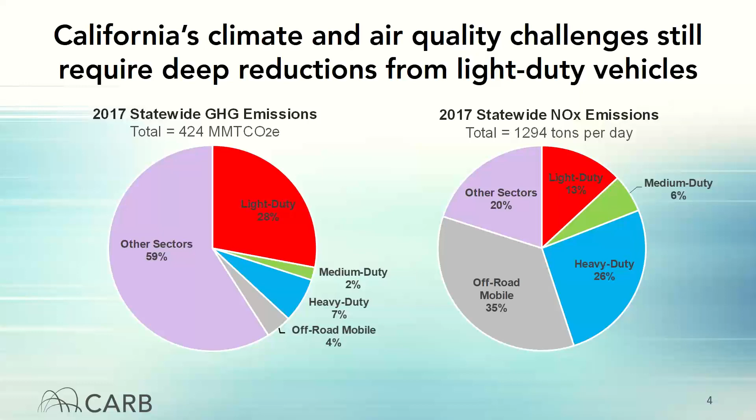Of course, this transition to electrification will not be free, and you will hear an update on our cost estimates for these ZEV technologies. We have also begun meeting regularly with advocacy organizations and community groups to gather feedback on ways to increase ZEV accessibility to priority communities, and hope we can share some details on those proposals at our next workshop.

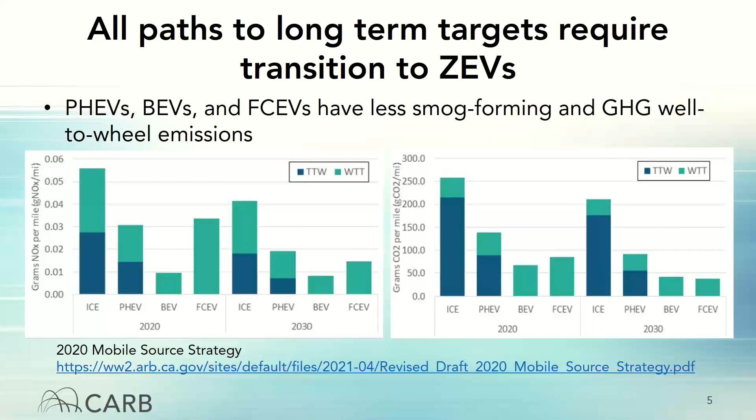However, as you will hear later in the presentation, future plug-in hybrids will need to be both cleaner and more advanced than the ones you see in showrooms today. And given the greater uncertainty surrounding their emission benefits, as well as the limited supply of liquid biofuels that will be available in the future, the degree to which plug-in hybrids can be used for this transition will be constrained.

Nevertheless, we believe that all three technology types will be necessary to achieve the governor's goal of 100% ZEV sales by 2035, announced shortly after our last workshop. In that executive order, he directed CARB to set regulations toward meeting this goal, and you will hear more about those proposals later in this presentation.

So we'll start today with updates to our low emission vehicle criteria pollutant proposals. That will be followed by the proposed changes to the zero emission vehicle regulation. Then after a break around 11, we'll update you on our work on ZEV technology costs before moving on to updates on the ZEV assurance measures. And then we'll wrap up with our proposal for battery labeling to facilitate recycling and reuse. We'll stop for questions again after each of these before concluding with our next steps. So I'll now pass it on to Marco to start with our first item.

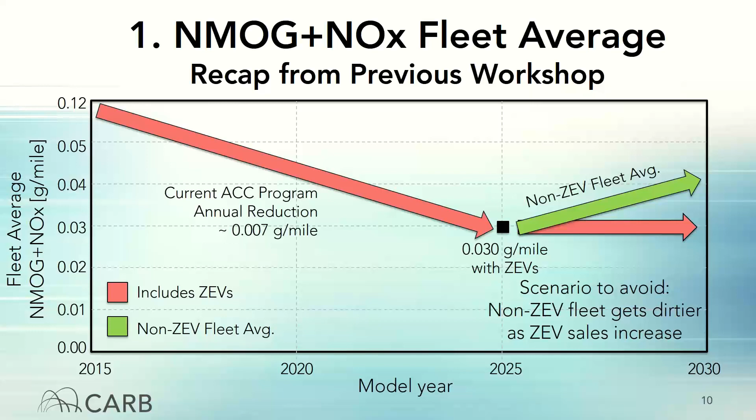At our last workshop, we presented a couple of options on how to resolve this issue, and we sought feedback from stakeholders regarding whether we should continue to keep ZEVs in the fleet average but continue to lower the average beyond 2025, or whether we should take the ZEVs out of the fleet average so that the non-ZEVs have to comply on their own.

Based on the feedback we received from stakeholders, CARB is proposing to move forward with a non-ZEV fleet average beyond 2025. Overall, this option has slightly more support from stakeholders, and it provides more certainty and predictability regarding the future emissions from the non-ZEV fleet.

CARB is aware that the non-ZEV fleet emissions will be above 0.030 grams per mile in 2025. As such, we are continuing to consider the proper phase-in period to transition to a 0.030 gram per mile non-ZEV fleet average. Our current analysis indicates that a phase-in could be achieved over 2 model years, but we are continuing to gather data to ensure this will not create undue burdens, especially for automakers that have higher ZEV sales in 2025.

Separately, staff are still evaluating whether it will be feasible to further lower the non-ZEV fleet average below 0.030 grams per mile. We are aware that cost effectiveness is a concern here, and it will be a guiding factor in making this decision as we gather more data and conduct analysis.

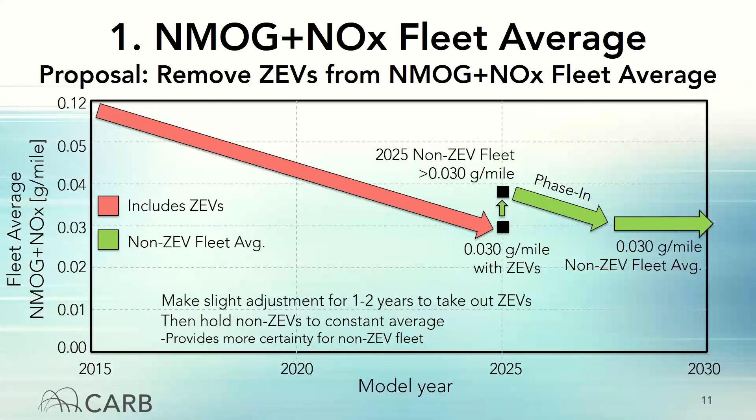ACC2 is moving ahead with the proposal to eliminate the LEV 160 and ULEV 125 bins. While the exact dates for the phase-out of these bins have not been finalized yet, our plan is to remove the LEV 160 bin first, followed by a subsequent phase-out of the ULEV 125 bin, rather than having a simultaneous removal of both.

In addition to removing the highest bins, stakeholder feedback also indicated support for adding new bins, especially at the lower end of the spectrum, as these changes will help with the transition to the non-ZEV fleet average and encourage automakers to certify vehicles to cleaner levels.

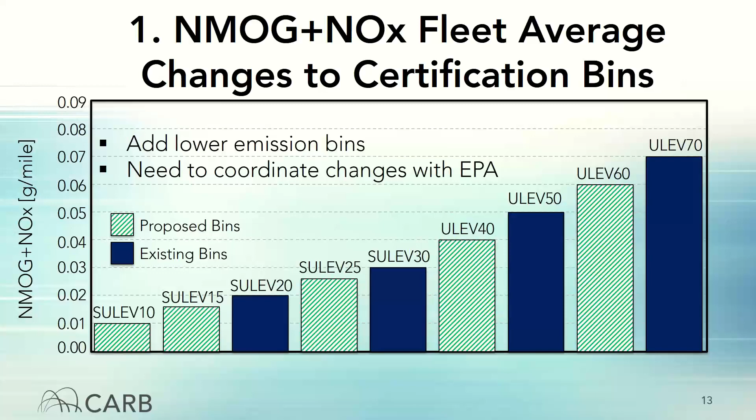As we continue to develop this proposal, we intend to work more closely with the EPA on these potential bin changes, as these modifications will work best if implemented in coordination between the agencies.

Now let's move on to the NMOG plus NOx standards for aggressive driving.

Under our current rules, almost all automakers certify their aggressive driving emissions using a composite method which combines the emission results from three different test cycles. We have the FTP cycle, which represents lower speed urban driving, the SC03 test, which represents urban driving but with the air conditioning turned on, and finally the US06 cycle, which represents driving with aggressive accelerations and freeway speeds.

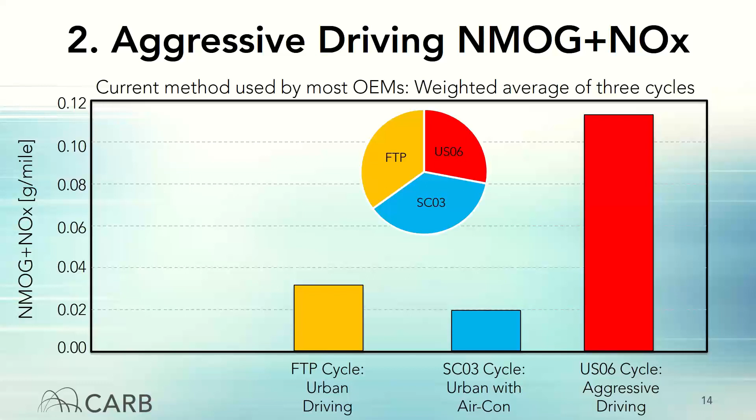The emissions from these three tests are then weighted according to the fractions shown in the pie chart, and the composite value is calculated. The issue with this approach, as we can see in this graph showing an example for a SULEV 30 vehicle, is that it allows the aggressive driving cycle to have much higher emissions than the other two cycles.

In the past, there were concerns that vehicles could have poor air-fuel ratio control during transitional operation that might occur during hard accelerations and could lead to higher emissions on the US06 cycle. But modern vehicles generally have much more computing power and much better throttle and fuel injection control, and this is not a concern anymore.

Therefore, our plan is to propose a transition that will require all vehicles to certify to standalone standards for each test cycle.

Current regulations already have standalone standards in place, where each cycle is required to meet the emission levels shown by these black lines. But currently, this method is optional.

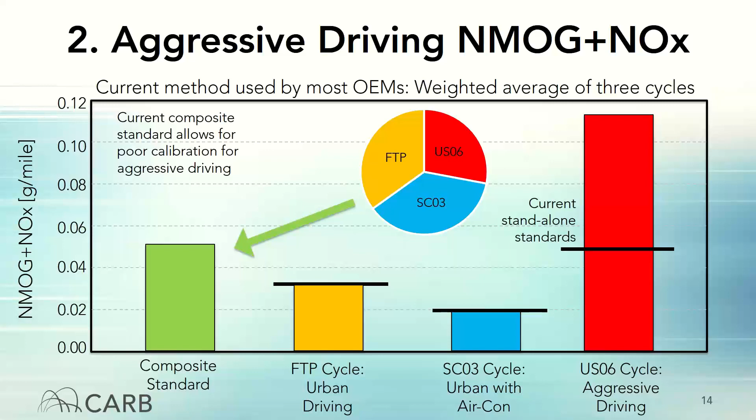Furthermore, the current standalone standards were based on LEV2 vehicles and only have two certification bins, one for all SULEVs and one for all ULEVs. New bins are needed to support a proposed transition to the standalone standards for ACC2.

These results were quite consistent with the certification data, which indicated that over 80% of the fleet would be able to meet these new standalone standards.

Therefore, based on our analysis of the vehicle test results and certification data, our proposal will require all vehicles to meet standalone US06 standards for NMOG plus NOx that are equivalent to the FTP certification bin of the vehicle.

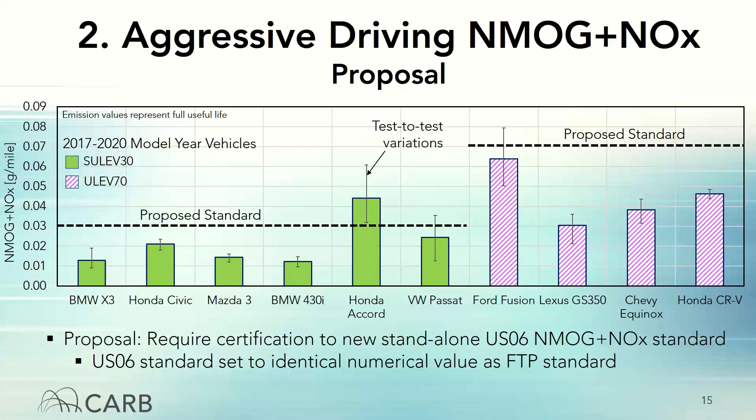Next, I'm going to go through the changes we are proposing to ensure better control of cold start emissions. This is especially important since for light-duty gasoline, cold start emissions often represent the bulk of criteria exhaust emissions released during a trip.

Our current rules only regulate cold start emissions that follow an overnight soak, where the vehicle is turned off for 12 hours or more, assuming that it represents the worst case emissions with a fully cold engine and catalyst.

CARB has already reached out to automakers regarding this issue, and most have already taken voluntary action to reduce these excess emissions.

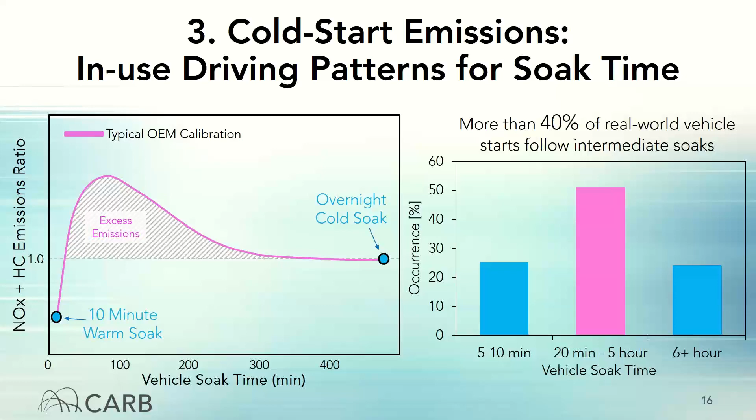However, we still don't have any reg requirements to protect against this emission bump from occurring. Therefore, staff has been testing new vehicles that already have the voluntary fix in place to help gather data to develop a reg.

Here we can see that the emissions consistently reduce as the soak time reduces. These lower emissions make sense since the engine, the combustion chamber, and the initial catalyst temperature are all warmer for shorter soaks, so engine out emissions can be lower and catalyst light off can be achieved earlier compared to longer soaks.

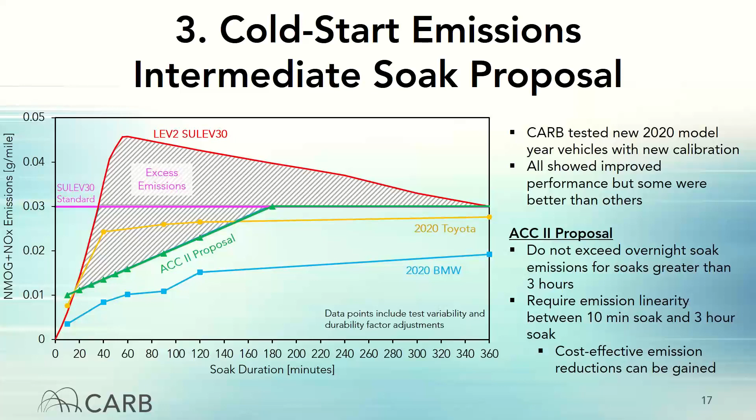Staff believe the additional emission reductions will be cost-effective and can be achieved mostly by calibration changes. While the details are still being ironed out, the intent is for automakers to attest to meeting these new rules, rather than adding new strenuous test requirements at multiple soak points.

Another cold start issue that CARB has been investigating concerns excess emissions that can occur when a real-world drive-away is quicker than those on lab test cycles. For reference, the cold start FTP test has an initial idle of 20 seconds.

The new data still indicated that a large share, over 60%, of in-use trips have a faster drive away than the FTP cycle, with the median time being around 14 seconds, and with 24% of trips having a drive away of 5 seconds or less.

Additional in-use data analysis was shared by a few automakers, and although there were some variations, the data still suggested that there was a large share of in-use trips that had a quick drive away, with 25% being faster than 8 to 10 seconds.

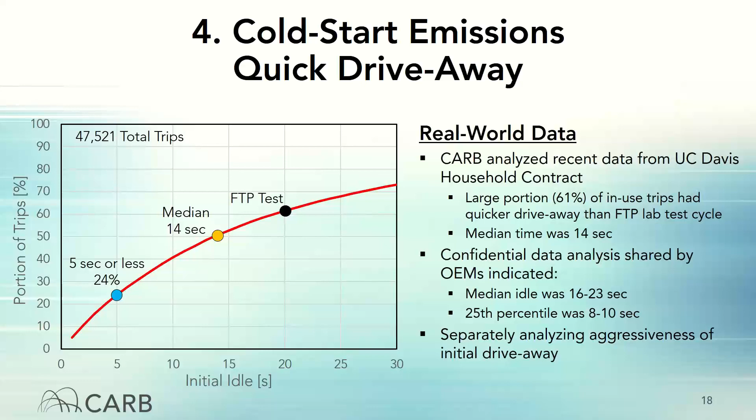Staff is continuing to test more vehicles and will continue to evaluate in-use driving data and analyze emission test results to determine an appropriate rule that will help control these excess cold start emissions. The data analysis will help determine whether developing a new standard based on the best performing vehicles or drafting calibration guidance language will provide more robust emission control for quick driveaways.

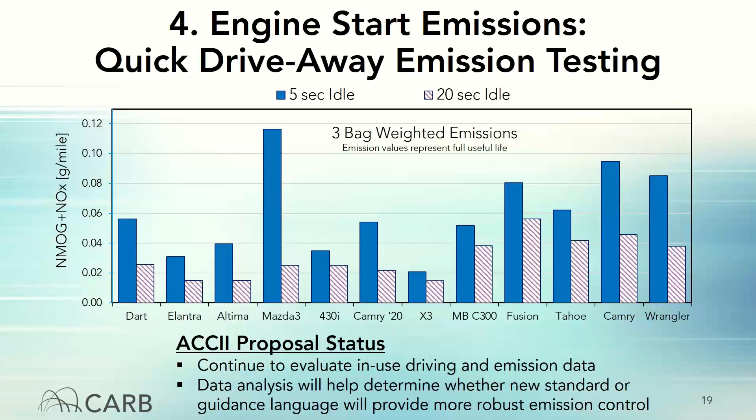There are also cold start issues that are unique to plug-in hybrid vehicles. PHEVs can start out driving in pure electric mode. Then, when they get to the freeway and accelerate hard, the ICE can turn on at the worst possible time during high power demand, and there will be a huge spike in emissions.

But we can also see that when the engine does start under high power demand, the emissions for passenger cars are still higher than the certification cycle. However, when averaged out with the non-starts, the average emissions for cars are relatively close to their certification standard.

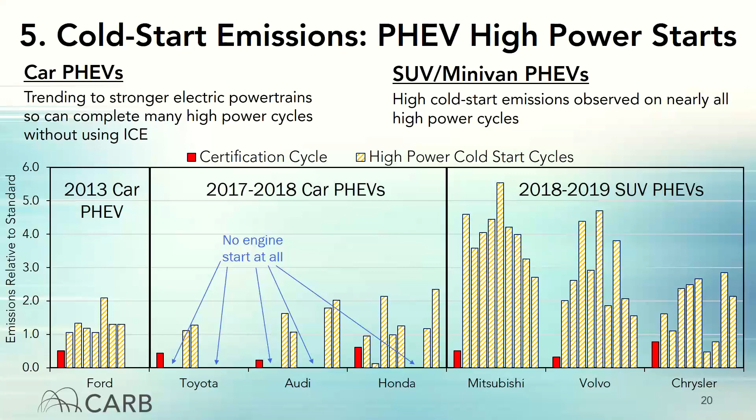On the other hand, the SUVs and minivans showed much higher emissions, and the engine starts occurred more frequently, since the electric powertrains were not capable enough to handle the extra vehicle weight. To help curb the excess emissions we are seeing from some of these heavier PHEVs, staff is working on a proposal that aims to limit these emission impacts.

The test data indicates that a standard of around 100 milligrams per mile could be set for a SULEV 30 PHEV. For reference, this is double the current hot US06 standalone standard. Staff envision this will be a cold bag standard, rather than a weighted average.

Furthermore, PHEVs that are non-blended or US06 capable, meaning that they can drive the US06 cycle fully electric without using the gasoline engine, would be exempt from this requirement.

As we continue to work on this and our other exhaust emission requirements, we encourage stakeholder engagement and we look forward to the feedback. I will now hand it over to Jason Gordon to go over our plans for evaporative emissions.

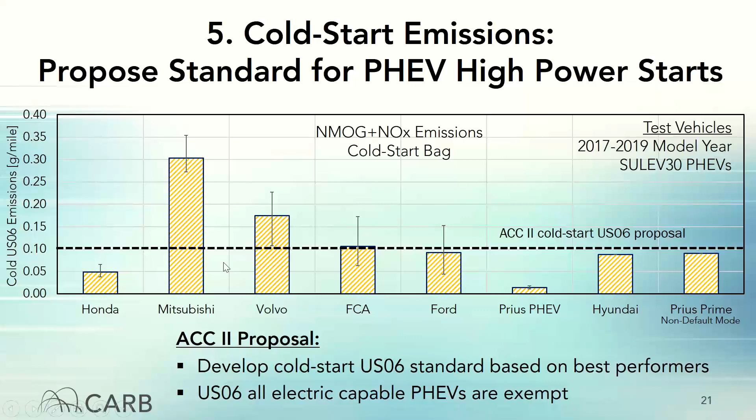All right, thank you, Marco. I'm Jason Gordon, and I'll be going over the evaporative emissions portion of the proposal.

The first part of the evaporative proposal involves tightening the running loss standard. At the last workshop, we actually proposed changing this standard from 0.05 to 0.010 grams per mile. Running loss emissions are the evaporative emissions which occur when the vehicle is actually driving, and it's primarily due to fuel vapors that escape the fuel system during driving.

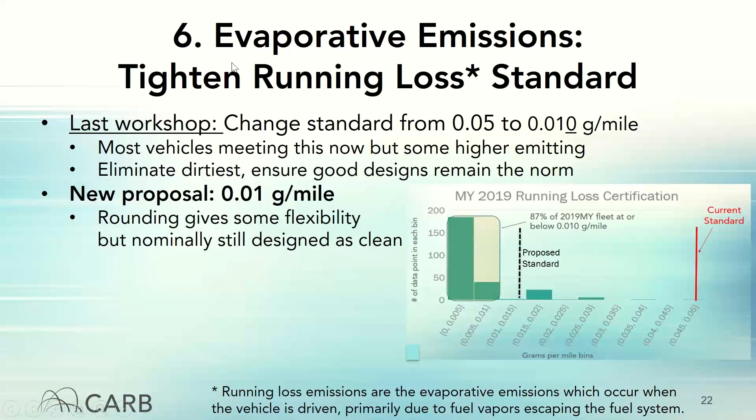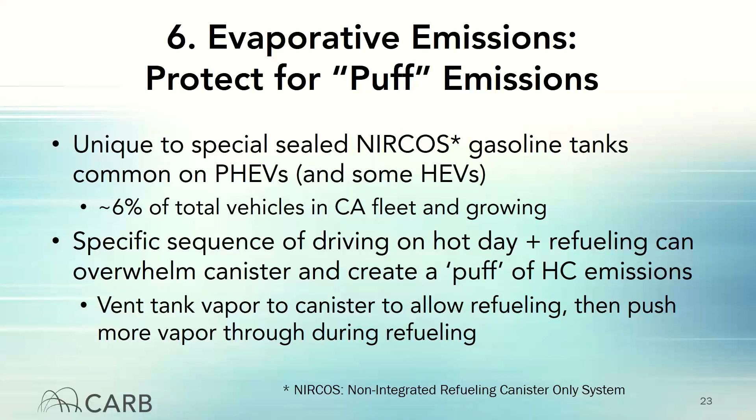So moving to the next slide. The problem we're trying to address with this puff emission proposal is that current test procedures don't capture this worst case event I was just describing, and it could allow undersized canisters on vehicles that let vapors break through to the atmosphere during refueling.

Based on our initial estimate, about 80 to 90% of vehicles with NIRCOS fuel tanks, these sealed fuel tanks, do have a large enough canister, but some appear not to. Which brings me to our proposal: to specify a minimum canister size in the regulation.

Car manufacturers would demonstrate compliance to this proposal using a CARB-defined model. It's basically an equation where you input vehicle-specific parameters, and the equation outputs the minimum canister size for that particular vehicle.

I want to point out, as Belinda mentioned, there are handouts attached to this webinar. One of those deals with the puff equation, detailing how it would be used and how it was developed. After folks review that, we're happy to discuss it further if you have any questions.

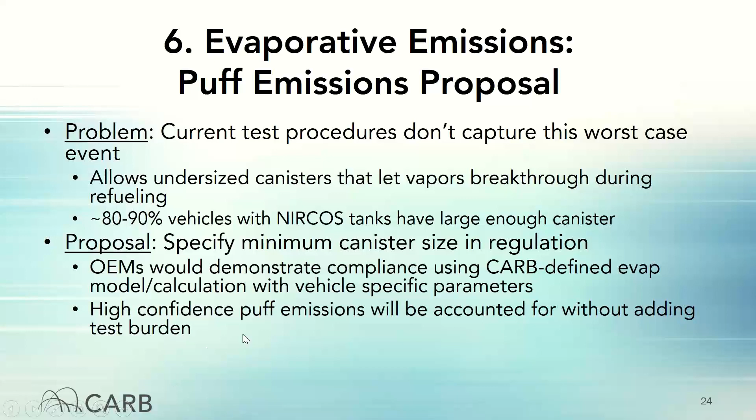We have a high degree of confidence that puff emissions will be accounted for using this new proposal without adding additional test burden. That's our goal. That concludes the evaporative emissions portion of the proposal, so I'll pass things on to Kevin Soti for the next portion.

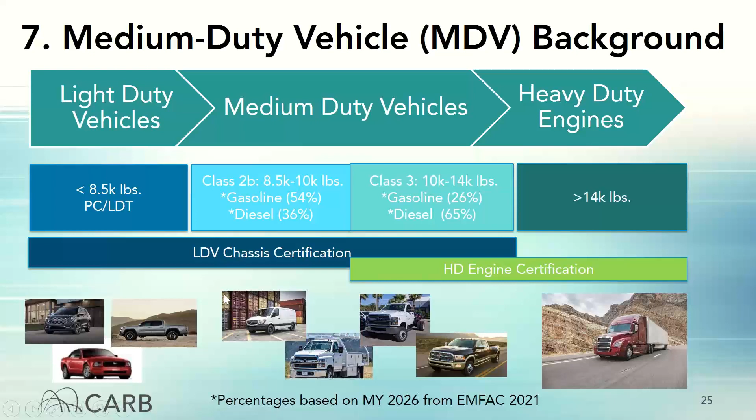To ensure good emission control in areas of engine operation beyond what is covered by current light-duty based chassis cycles, we were evaluating an in-use standard for chassis certified MDVs using portable emission monitoring systems, known as PEMS, and the 3-bin moving average window method newly adopted for heavy-duty engines. In the next few slides, we will provide the results of our testing.

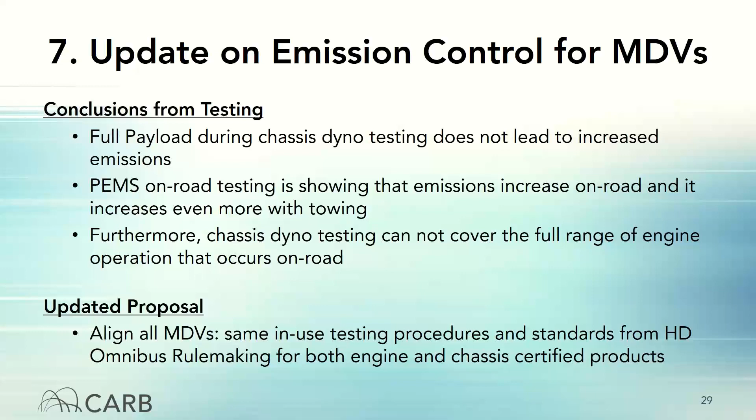This would mean that all MDVs, regardless of how they are certified, would be required to meet the same in-use standards. This will better ensure equivalence across the MDV class and also help ensure robust emission controls for the full range of engine operation that occurs on road.

For those of you not familiar with the newly adopted heavy-duty procedures that already covered the engine-certified MDVs, this will give you a little background on how it works and how it will be applied to chassis-certified MDVs.

Testing is done on-road for both gasoline and diesel MDVs, and second-by-second emissions and engine operating data is collected with the PEMS.

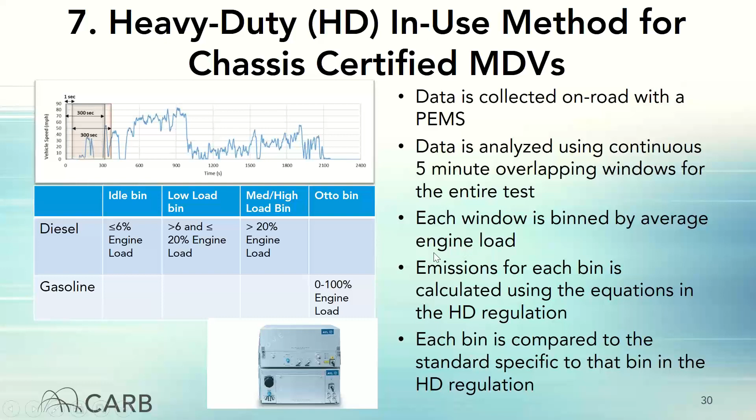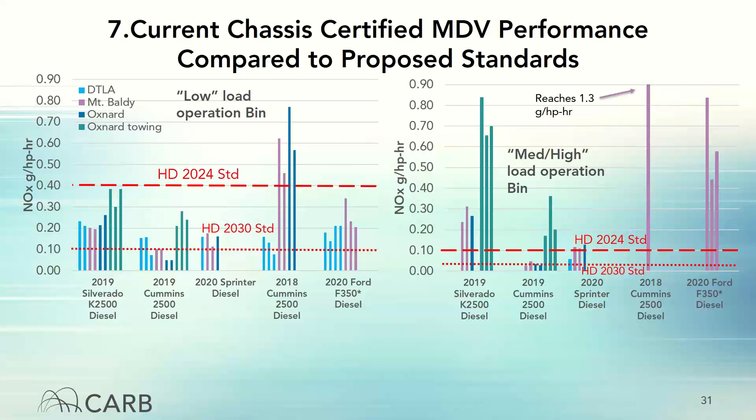That said, the previously mentioned 2019 Cummins is already very close, except while towing, and that is with its current hardware configuration. While it is not shown here, we have also evaluated the idle bin for diesels and found that chassis certified MDVs can readily meet even the heavy-duty 2030 standard.

We have also started testing gasoline MDVs and will be evaluating the Otto bin heavy-duty standards. And of course, we will need to continue our evaluation of diesels to ensure consistency with the heavy-duty standards for engine certified MDVs, and to develop an implementation timing for these new standards on chassis certified MDVs.

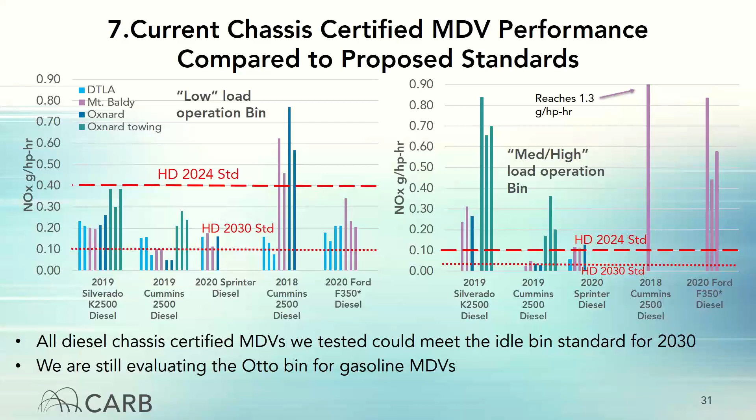So next, we will be changing topics a little to introduce a new MDV proposal, which will be a standalone standard for MDVs. Currently, MDVs are certified to a composite supplemental FTP standard similar to light-duty vehicles that takes into account emissions across 3 different cycles.

However, just like light-duty vehicles, the composite standard does not ensure good emission controls during US06 driving conditions. We have now collected test data on several MDVs in Class 2B and Class 3 on the US06 and unified test cycles, and believe the data supports more stringent standards. Accordingly, we are proposing to adopt a new standalone standard for MDVs on the US06 test cycle that will better ensure robust control than the current composite standard does.

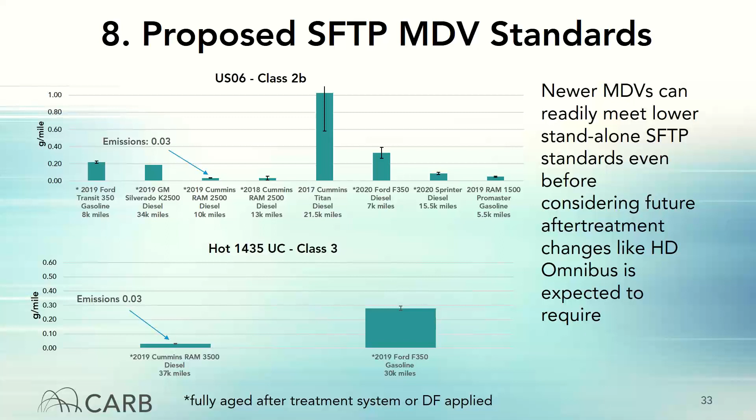In this slide, we provide test data to support our proposal. Testing was done for several different MDVs, certified to the LEV 3 standards on the chassis dyno. As a reminder, Class 2Bs are certified using the US06 test cycle, tested on the top graph, and the Class 3 vehicles are certified using the unified cycle, tested on the bottom graph. Each bar represents the average emission results for that vehicle based on several replicate tests, and represents emissions at full useful life, either through the application of a deterioration factor or testing with an aged aftertreatment system.

So to show the existing composite standard, the US06 and unified emission results for the majority of the vehicles are already well below the composite standard, but we do have one example vehicle that, while compliant with the composite standard, has emissions on the US06 cycle that are 4 to 5 times larger than the others.

I'd also like to point out the previously mentioned 2019 Cummins Ram, which is emitting at levels far below the composite standard and is much cleaner than most other vehicles for both the Class 2B and Class 3 models. The vehicle has shown it can be clean on the road and on the dyno with its current hardware, even before considering aftertreatment changes, which would be expected as needed to meet the future heavy-duty low NOx standards.

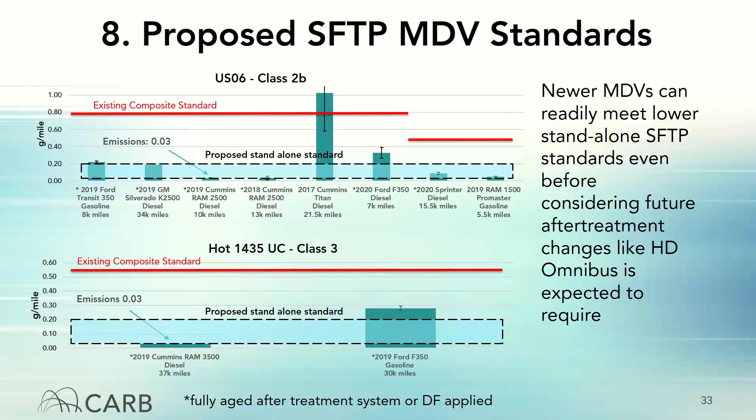At this point, we are still investigating the level of stringency for our proposed standalone standard. We have not determined the exact emission level yet or the potential implementation timing, and we will be following up with more testing and discussions with manufacturers to refine the proposal. But our intent is to clearly align the stringency not just with what the better performers today are capable of, but also with the expected improvements that would come with meeting the same in-use PEMS-based standards as adopted for the engine certified MDVs in the heavy-duty omnibus package.

So as this is a workshop, we would like to hear feedback on the proposed in-use method and standards that we presented today. And as noted, we are continuing to test vehicles and look at test data, and will be developing regulation language for our MDV proposals.

Further, given the different typical usage of MDVs than light-duty vehicles, such as in small business fleets, last mile delivery, and vocational usage, and the higher fraction of diesel engines, we plan to separately look at the impacts of our MDV proposals on disadvantaged communities when analyzing the cost and benefits.

Thank you. This concludes the part of our workshop on our proposals for heavier vehicles. We will now move to questions.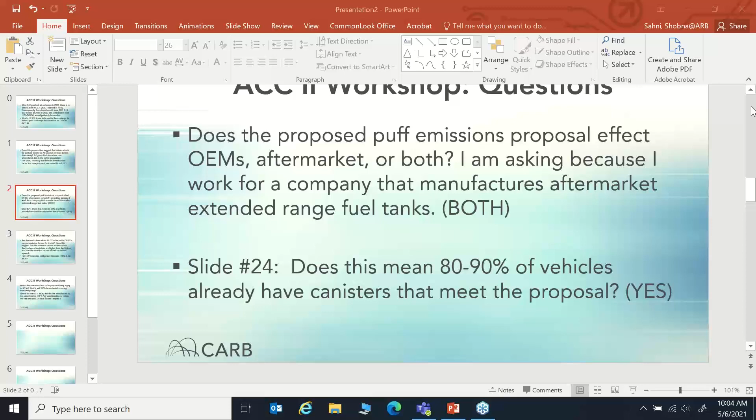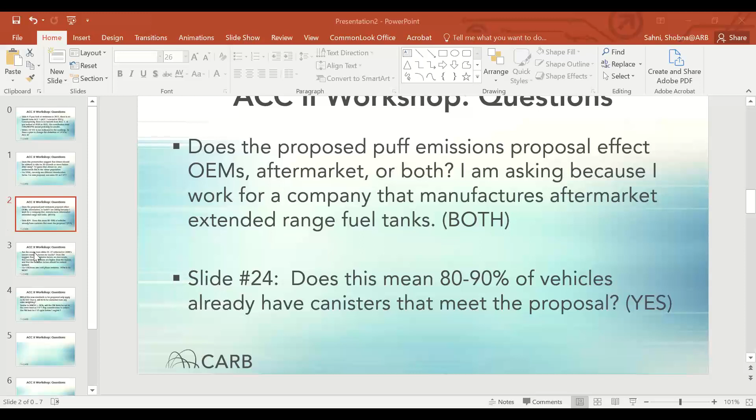Yeah, that was the point I was trying to convey there - that based upon our preliminary analysis of current vehicles that use that specialized type of fuel system, the normally sealed fuel system, it looks like about 80 to 90% of the vehicles already have a canister that's big enough to meet that proposal. So that's it for those two questions. Okay. All right, let's go to our next question here.

Are the results from slide 26 to 27 reflected in CARB's current emission factors for trucks? Does this suggest that the emission factors are inaccurate, that real world emissions are higher than the factors, and that emission factors should be revised upwards? So for - and these are for medium duty vehicles, right? Marco or Belinda, can you bring up those slides?

Yeah, sure, Mike. So, this was about medium duty, where we saw that when we take the trucks on-road, we're seeing higher emissions than we see on the chassis dyno test cycles.

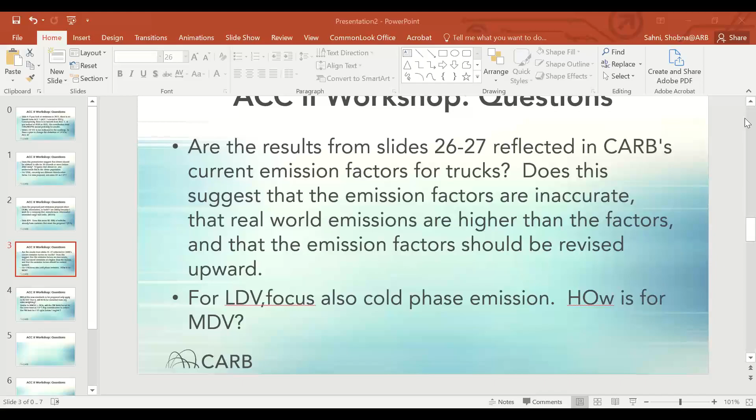So we have to loop back with our inventory people on the modeling. They've used mostly on-road data to populate some of the heavy duty factors, and mostly chassis dyno to populate some of the light duty stuff. So I'm not positive yet whether in the medium duty sector they've relied more heavily on chassis dyno work or on-road PEMS-based work. We'll have to follow up with them and see what they've got modeled.

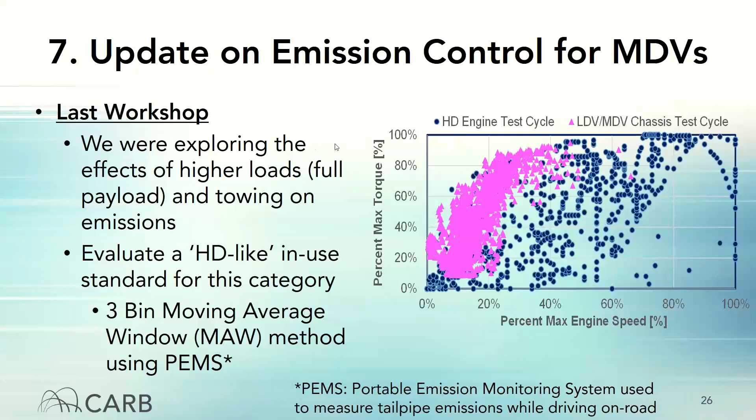Unfortunately, that's sort of the normal process when we consider new rulemakings. We look for areas where there could be excess emissions that we could clean up. Sometimes they're reflected in the model already, sometimes they're not, because we discover new things and then we have to reflect them in the model.

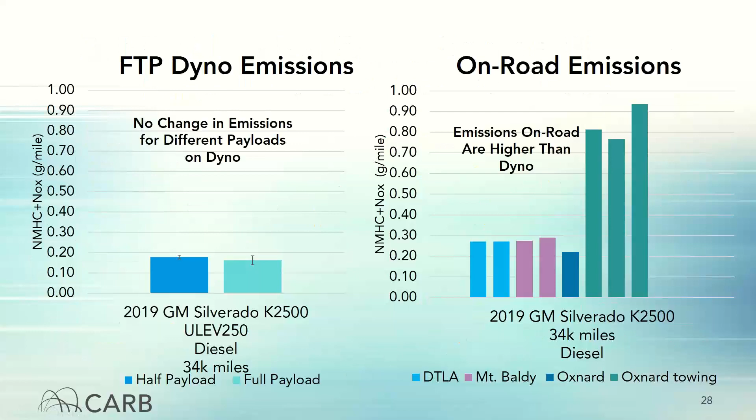But this one, I know they've updated the heavy duty quite a bit, so I think it's worth going back and looking where they're at right now and whether we think it's reflective of what we're seeing.

The other part, which leads to another question somebody already asked, is we don't have good data on what fraction of the time these vehicles are being operated at half payload, full payload, a little bit of towing, or heavy towing. I think the answer is probably all of the above. The medium-duty category is very diverse, from individual private citizen owners that occasionally do things with them to effectively business fleet work trucks that do work all the time.

So if somebody does have data that could help us there, that would be very useful in updating our inventory assumptions. But we'll have to get back on how well our model currently reflects this variety of operation and the emission levels we're seeing on the trucks today.

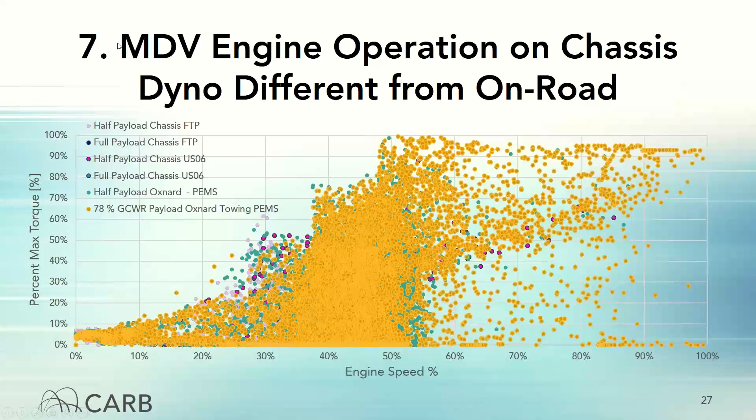In one of the slides, we had some background on medium duty vehicles, and there's a lot more gasoline in that category. Usually for gasoline, there isn't a huge problem on idle. In the bins for diesel medium duty vehicles, there is an idle bin, so they will be meeting those standards. I don't know, Mike, if you wanted to add anything more to that.

There are several questions on PM. We're going to cover those mostly in our next workshop, so I apologize, but hold your questions on that one, because we've been focused on NMOG plus NOx at this point. There are also some questions around the inventory, modeling, and health effects. We're working with our modeling folks quite a bit right now to try to see, as I described, sometimes you discover areas that are not reflected in the model. So we have representative data so we can model the health benefits and emission benefits of some of these things. Stay tuned.

We are working closely with the EMFAC team now that they've got their 2021 version out there.

There's also a fair amount of questions about when would these new proposals start. We're not going to have all these proposals simultaneously go into effect in a single model year. As we've worked with manufacturers in the past, we tend to support phase-ins of these kinds of things. It's almost a line-by-line item to figure out what things take what kind of lead time, and stuff with calibration changes. We generally put in shorter lead time and quicker phase-ins for some things, and for stuff that would potentially require hardware changes, we do something different. So that's a fair question, and we're trying to refine the proposals and the starting implementation timelines, which we imagine will go back and forth with some dialogue as manufacturers think about their individual product plans.

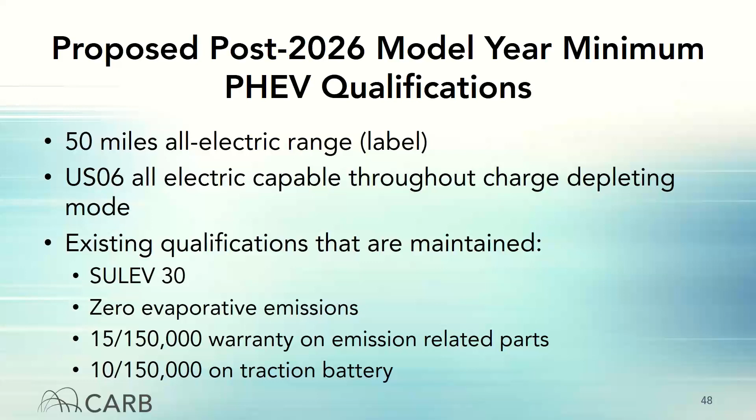Even with these new minimum qualifications, plug-in hybrids would be expected to still have a significant portion of the overall VMT from operation on gasoline, which will impede progress toward our need to meet greenhouse gas and criteria pollutant reductions. As a result, consistent with the current ZEV regulations, plug-in hybrids will not be allowed to fulfill a manufacturer's entire ZEV requirement. And of course, plug-in hybrids would be optional, not required, as we expect some manufacturers to continue to fully pursue ZEV technology and forego building plug-in hybrids altogether.

In an effort to balance the emission reductions necessary from light duty with the benefits that plug-in hybrids could offer to grow a ZEV market, staff is proposing to cap where plug-in hybrids can be used to meet up to 20% of the required ZEVs in any given year. Additionally, staff is proposing the same 5-year credit life on new plug-in hybrid credits as is being proposed for ZEV credits, and a continuation of past policies where plug-in hybrids earn credits separately tracked from ZEV credits.

And can only be used toward the allowable plug-in hybrid portion of the total requirement. Staff believes this proposal, along with the raised minimum qualifications, helps to balance the need to ensure maximum emission reductions while offering the most options for manufacturers and consumers.

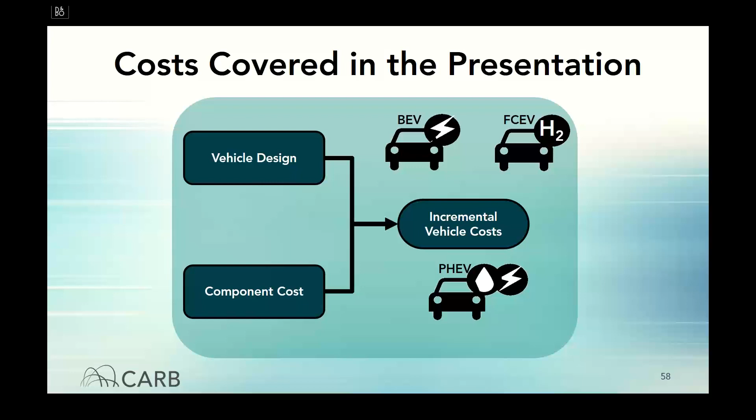Thank you, Andrew. The industry continues to change and move forward, even in the relatively short time period since our last workshop. Even cheaper batteries are being projected by more and more analysts, with some OEMs bolstering those projections with new announcements. Fuel cell stacks are getting smaller while also becoming more durable and lower cost, which leaves more space to increase hydrogen tank capacity.

And non-battery components like motors and inverters continue to shrink in size while also getting cheaper and more efficient. We have gathered several sources to help inform our cost analysis, particularly for non-battery costs. We are using a suite of electrified vehicle teardown reports, including CARB's Ricardo hybrid and plug-in hybrid component teardown, UBS's Chevrolet Bolt EV teardown, and Munro's 12 electric motor comparison, 6 inverter comparison, BMW i3, Chevrolet Bolt EV, and Tesla Model 3 comparison.

As well as the full vehicle BMW i3, Tesla Model 3, and Tesla Model Y teardowns. We have continued our work with an analysis of US DOE funded tools and reports like BATPAC and the Strategic Analysis Fuel Cell Cost Analysis. Additionally, the National Academy of Sciences has recently released its assessment of technologies for improving light-duty fuel economy for 2025 to 2035 report. We have not had enough time to analyze and incorporate the findings of that work, but we'll do so shortly.

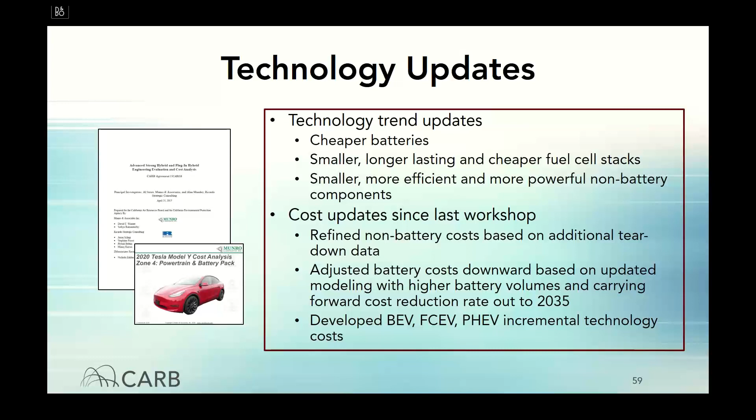The combination of teardowns and continued analysis of technology trends and costs has led us to some changes and additional results since our last workshop. Those include a refinement of non-battery costs bolstered by all the previously mentioned sources. We have also adjusted battery costs downward based on higher projected battery manufacturing volume and carrying forward that cost reduction rate out to 2035. From that work, we have been able to roll up battery and non-battery costs into incremental cost packages for BEVs, fuel cells, and plug-in hybrids for various vehicle classifications in the fleet.

Here are the different categories that make up each of the different zero-emission vehicle technologies. For battery electric vehicles and fuel cell electric vehicles, those categories consist of a battery cost group, a non-battery component cost group, an engine delete cost, and a ZEV assembly cost reduction category.

There are differences in the specifics of the makeup of these categories. For instance, a FCEV has fuel cell and tank costs in the non-battery component cost category and a smaller battery, while the BEVs have onboard chargers and larger batteries. The plug-in hybrid electric vehicles are more unique in that they still have battery and non-battery costs, just like the FCVs and BEVs, but they also maintain their internal combustion engine, so they do not get a delete engine cost. And due to their complexity, they do not get to claim the ZEV assembly cost reductions.

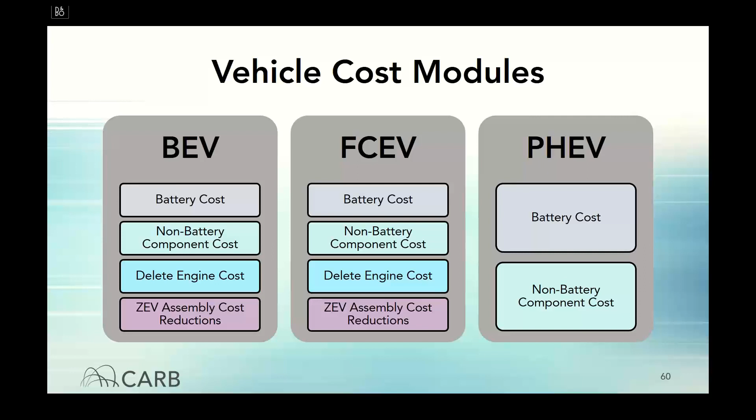One thing to note here is that there is not yet a category for costs related to our ZEV assurance measures. This is something that we are currently working to develop. Lastly, as we move into describing some of the specific costs we are using, it is important to note that all the costs in this presentation are estimated to be direct manufacturing costs to the OEM and are not the same amount that the OEM might be expected to increase the sales price or that a consumer might expect to pay for that vehicle.

This is a chart displaying our updated projected battery pack costs in dollars per kilowatt hour from 2025 to 2035. The upper blue dotted line shows the fuel cell electric vehicle battery pack cost. It is quite a bit higher than the BEVs and plug-in hybrids on a dollar per kilowatt hour basis for a few reasons. First, the battery packs are very similar or even identical to conventional hybrid electric vehicles in some applications. This means that the battery cells used in those packs have a much higher power to energy ratio, and the battery packs themselves have a much lower total energy capacity, in the range of 1 to 2 kilowatt hours.

Second, the ratio of active battery cell material to inactive battery cell and pack materials is much lower than the PHEV and BEV battery packs. As mentioned in my technology update, we have adjusted battery pack costs downward based on higher projected battery manufacturing volume and applying that cost reduction rate out to 2035.

The bottom red solid line on this chart represents our projected BEV battery costs, and the callout labels show a few specific years. We are projecting a battery cost of $100 per kilowatt hour in 2026, which declines to about $80 in 2030 and down to roughly $65 per kilowatt hour in 2035.

PHEV battery packs, as shown by the purple dashed line, are roughly 30% higher than the battery electric pack costs on a dollar per kilowatt hour basis due to similar reasons as the fuel cells, although the effect is not nearly as drastic. I will hand it over to Andrew to walk through the next slide on the fuel cell system costs.

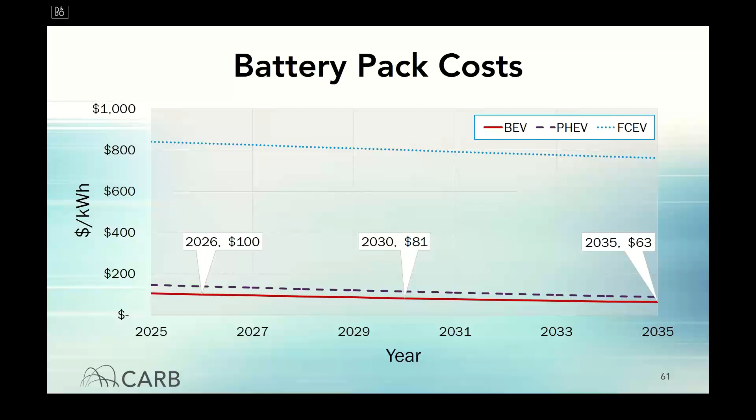Thank you, Ryan. In developing our estimates for fuel cell electric vehicle incremental costs, we relied on two primary data sets. First, we relied on U.S. Department of Energy studies to specify vehicle attributes for future fuel cell vehicles in all vehicle classes. Through its Hydrogen and Fuel Cell Technologies Office, the U.S. DOE and partners complete research to advance the technology and commercialization of fuel cell and hydrogen storage systems for fuel cell vehicles. Periodically, Argonne National Laboratory studies estimated future fuel cell vehicle costs based on the latest and projected technology status. These studies utilize the model Autonomie to specify the vehicle component specifications required to achieve expected vehicle performance in each classification.

We have adopted the vehicle specifications from the 2020 analysis. In addition, system component costs are updated every year for the U.S. Department of Energy through a separate analysis completed by Strategic Analysis. We have worked with Strategic Analysis to obtain their most recent cost estimates for fuel cell and hydrogen storage systems. In particular, Strategic Analysis has provided estimates that include additional costs for high durability fuel cell systems that are not yet accounted for in prior publications.

A key benefit of the Strategic Analysis cost models is that costs are provided as a function of annual production volume. This is an important aspect for accurate cost modeling of fuel cell vehicles, as these vehicles are still in the early stages of commercialization and production capacity is ramping up. The figure on the left illustrates the Strategic Analysis data. As shown, today's production volumes are estimated in the range of 10 to 30,000 units per year, with fuel cell system costs between approximately $75 and $150 per kilowatt.

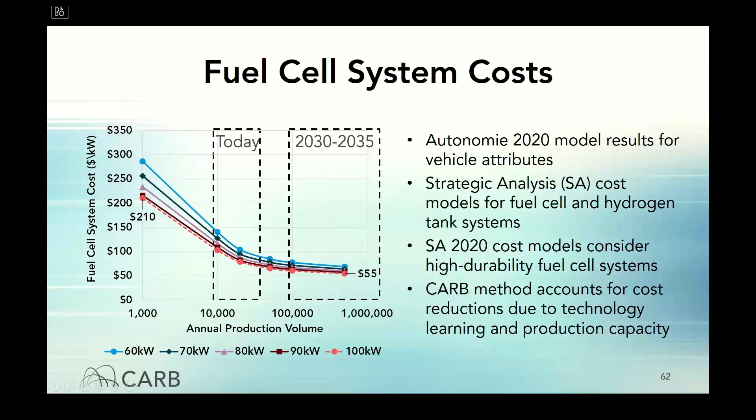What do those different packages look like for each of the ZEV technologies - BEVs, PHEVs, and fuel cells? We first had to decide on an all-electric range for each technology. For BEVs, we landed on 300 miles for a base version and 400 miles for the premium/high performance variant. Consumers appear to want more range, and OEMs are responding by increasing range year over year, with 300 miles becoming the new baseline. Manufacturers could still offer lower or higher range variants to best fit their customer needs, but for this analysis, it is assumed that a typical standard vehicle would have 300 miles of range. Additionally, 300 miles is likely where a much broader portion of potential customers would consider a BEV in place of a traditional gasoline vehicle, and this range offers more flexibility for those consumers that don't have reliable home or workplace charging.

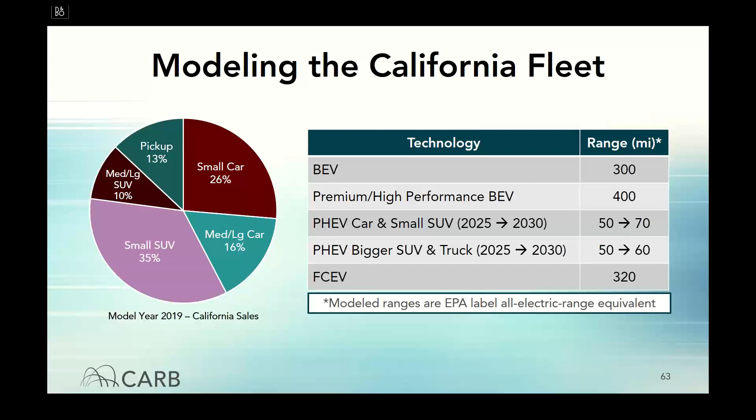For larger SUVs and pickups, they start with 50 miles of range and grow to 60 miles by 2030. After 2030, just like with cars and small SUVs, the vehicle is projected to get more efficient and the battery subsequently shrinks. For fuel cells, we are relying on the range modeled for the US DOE Vehicle Technology Office's analysis, which is 320 miles.

Now that we have described some of the cost inputs and range assumptions we are using, I will walk through what the output incremental costs look like for one example vehicle category, the medium and large SUV category. The graph shows costs for a medium SUV, all rolled up for 300-mile BEVs, 400-mile BEVs, fuel cells, and plug-in hybrids in model years 2026, 2030, and 2035. These are average incremental direct manufacturing costs to switch from a base ICE to one of the aforementioned ZEV technologies in the identified model year.

On the y-axis is the incremental cost for each technology, separated into each of the ZEV technologies on the x-axis. Another thing to note, as mentioned on the previous slide, is that the PHEV version increases from 50 to 60 miles of range by 2030, resulting in a smaller cost reduction from 2026 to 2030.

Evident in the chart is that initial manufacturing costs for these various technologies on this class of vehicles still reflect an increase over a gasoline vehicle, even with our current best cost estimates for the various components which make up each vehicle ZEV technology—things like batteries, fuel cell stacks, motors, etc.

These costs are not a determinant of a specific price increase to a consumer for a new car, and they do not incorporate any operating costs or savings from fuel, electricity, or maintenance. As noted earlier, we will be including all those aspects in our final rulemaking proposal as part of the overall costs and benefits to society and consumers.

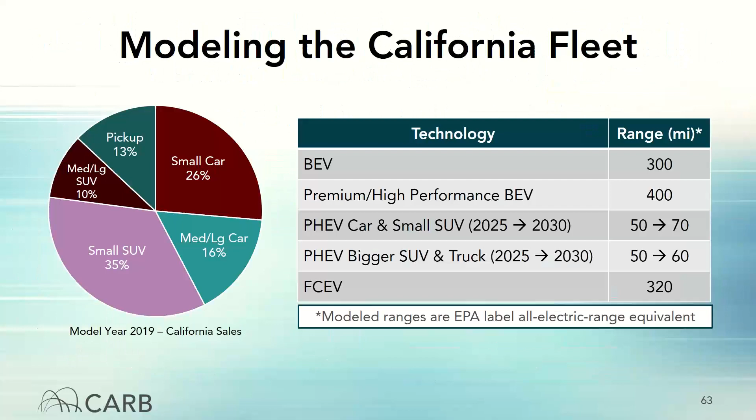I think Anna has control now. Okay, this is the right slide, right? Yes. Sorry, I was trying to shift to the slide as well so I could see it. So yeah, if you could read it again. My apologies, I didn't get it. So did you take into account possible resource... Oh, I'm sorry, are the costs on slide 61 assuming different production volumes?

Yes, it takes into account two things. We modeled battery production using BATPAC and looked at the cost reductions based on volume, and then applied additional learning to that as well. So it's a combination of the two factors.

We didn't cover this in the slide deck, but what maximum charge rates do you assume for BEVs? 50 kilowatt, 100 kilowatt, 150 kilowatt, or 350 kilowatt? And that's assuming, obviously, how you're charging it.

We haven't incorporated charge rates into the cost of the vehicles to adjust the battery design to necessarily account for those. We assume that they can charge at the maximum rates. Especially with the towing vehicles and that exercise, we assume they could charge at 350 kilowatts, partially due to the relatively large size of the batteries, which means a relatively low power demand as a function of the C rate of the battery pack. Additional data on the impacts of fast charging on battery pack designs would also be helpful.

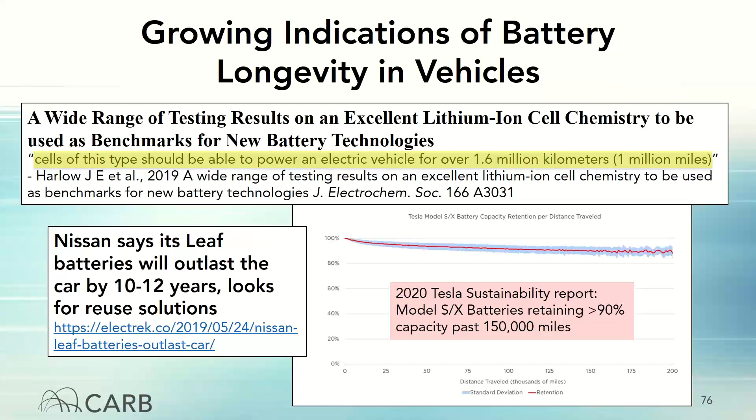For fuel cells, durability remains one of the largest technical barriers, but there has been continued progress in recent years. The industry-adopted standard for acceptable fuel cell system durability in an automotive application is no more than a 10% loss in output system power. The near-term U.S. Department of Energy target is to maintain this level of performance through 5,000 hours of operation, with a long-term target to achieve 8,000 hours of operation. Both targets are based on providing equivalent durability to conventional vehicles with 150,000-mile durability. The longer 8,000-hour durability is expected to be more representative of a wider range of real-world driving cycles and consumer driving behaviors than the 5,000-hour target.

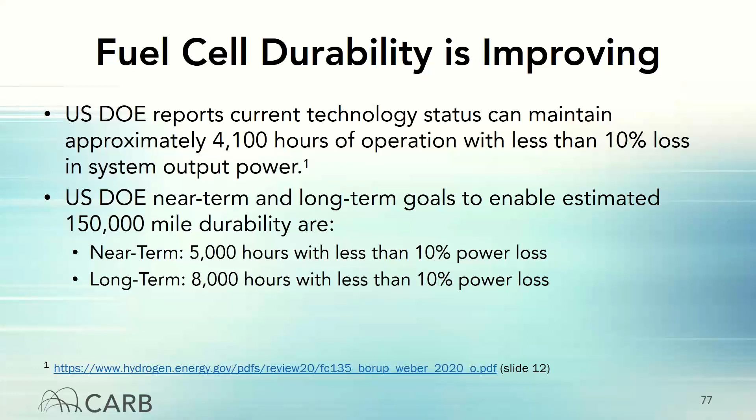In 2015, state-of-the-art fuel cell systems for automotive applications were reported to achieve 2,500 hours of operation while meeting industry-accepted durability standards. Now, the latest estimates from the U.S. Department of Energy for state-of-the-art systems indicate more than 60% improvement, with up to 4,100 hours of durability.

This improvement in durability is also evidenced by the warranties manufacturers are offering on these vehicles. On these two charts, we plotted powertrain and battery warranties by year and mileage for BEVs. You can see there are different size bubbles, and the size of the bubble corresponds to the number of sales associated with the warranty being offered at the time of sale. As you can see, this is a competitive space where many manufacturers are offering warranties beyond what's even offered for gasoline vehicles, many at 10 years or 100,000 miles, and even more for both powertrain components and batteries. This indicates that durability for these components is far beyond the levels manufacturers are actually willing to warrant.

When I add fuel cell vehicles, you can see manufacturers are offering competitive warranties in this space as well, both to themselves and to battery electric vehicles.

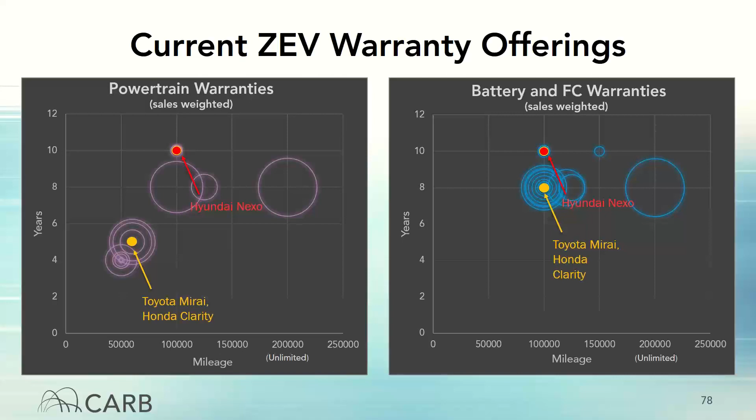Staff believe it is the appropriate time to build upon these advancements in battery and fuel cell technology and set a useful life standard for all 2026 and subsequent model year ZEVs.

Staff proposes battery electric vehicle test groups must be designed to maintain 80% of the certified test range, we call that UDDS range, for 10 years or 150,000 miles, whichever occurs first. Fuel cell vehicle test groups must be designed to maintain at least 90% of fuel cell system output after 4,000 hours of operation.

Equally as important as these performance criteria is how compliance with these standards will be determined at a test group level. Staff is considering how in-use compliance testing works, including aspects for manufacturer self-testing and CARB-procured vehicle testing, where traditionally a representative sample of vehicles is tested in the lab and determined if a test group on average fails.

Also, it is important when developing the follow-on testing proposal to consider what would be the scope of the appropriate remedies. For example, if a BEV test group were to fail due to excessive battery degradation, should all vehicles in that test group be subjected to a remedy, or only those vehicles that are actually below the threshold? Should the remedy be limited to no more than what is necessary to return the vehicles in that test group to an appropriate level of range given the age and mileage?

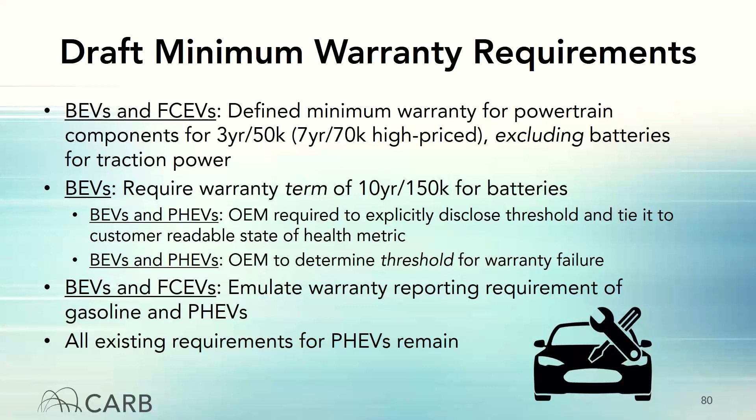The next question, slide 80 to 83: is my understanding correct that there will be no OBD or monitoring requirements like in CCR 1968-2 today for BEVs in ACC2, that there will be just standardization in data and tools to support independent repair shops and extra output of battery state of health and the special warranty requirement?

Mike? Yes, that is correct for the proposal today. We are not proposing to do the level of required diagnostics like the OBD2 reg you cited for BEVs and fuel cells. We think manufacturers are well aware of the diagnostic needs. It is a different situation. We didn't just apply the gasoline situation to BEVs.

We think it warrants a step back there. But we obviously, as Anna said, need to ensure service can still happen if service is reasonable. Can't afford going back to sort of a wild, wild west of requirements for repair technicians to try to stay abreast of tools and technology and terminology. So that's why we've tried to carve out a little minimum standardization, but not get into the level of mandating and overseeing every single component that must be diagnosed and to what level it must be diagnosed.

We have a couple other questions relating to this. For required standardization for vehicle data, do you consider the option of OTA?

So we have OTA, over the air, we need to talk about that. Certainly at this point, we're not proposing to standardize anything relative to OTA or over the air reprogramming. Generally, everything we're aware of, there is still a mechanism to recover and reprogram at least some of the vehicle ECUs, propulsion-related ECUs, or central computer through a tool and not through over the air. So it may be as simple as just having to worry about that one remaining central module, the module that helps you recover in the case where it is your primary module that is part of over the air updating. So I think we can talk about it and plan for it, but I think in that rare case that you need to do that one hardline reprogram event, it can be done in something like a J2534 compliant tooling and format.

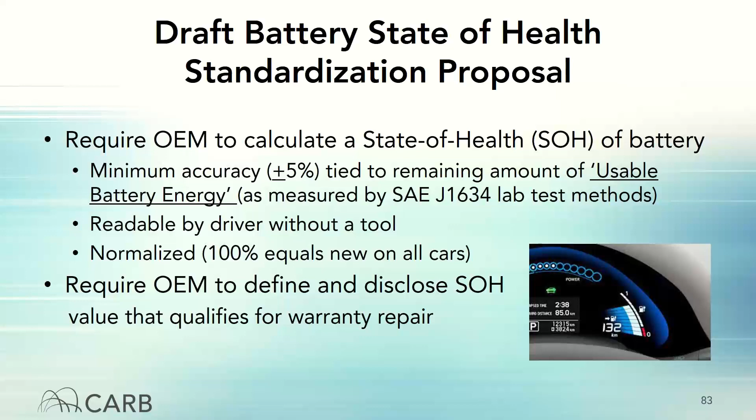Okay, did staff consider reserve usable battery capacity when developing the 80% UDDS certified range warranty requirement? Is it possible the requirement could drive excess UBE reserve on slide 79? So I don't know, Anna, if you want to go to slide 79 first, that way we can.

Certainly, we have debated this quite a bit internally. We've had discussion with a few manufacturers. It might be part of somebody's solution if they really don't have the confidence that they can stave off degradation. We've seen some plug-in hybrids do a bit of this to stave off degradation because of the full useful life greenhouse gas standards, that they have to maintain range or else certify at a higher CO2 level to reflect the full useful life battery there. We have not really seen that in BEVs yet, but it's certainly a possibility that somebody could look at that as part of the way to mitigate this. That's not something we mandate, encourage or discourage. That's the manufacturer's choice, just like they have today, in how they decide to manage degradation in the field.

To the extent that people do this, it can affect the SOH parameter. So we are trying to plan for that in the design of that SOH parameter so that we're actually still communicating a usable, meaningful number to consumers. If that SOH metric is blind to the reserve capacity, then it undermines the ability to be transparent and communicate any degradation to the consumer on that battery. So we are trying to plan for it there, and like I said, it may be part of somebody's solution for meeting customer demands or requirements for degradation.

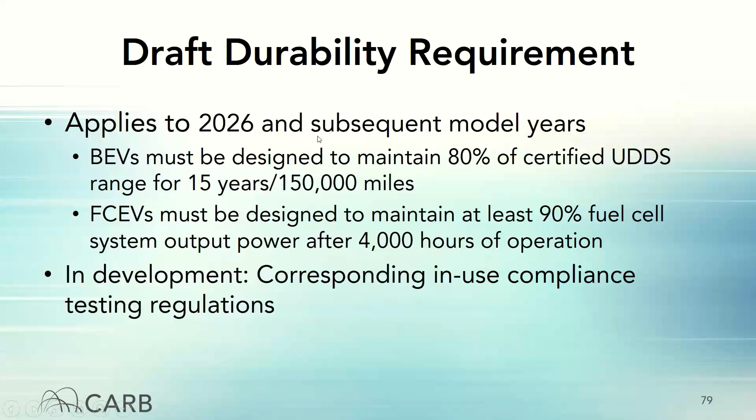Okay, there's a question here for battery swap vehicles. Consumers' fleets will not own the batteries, the model is battery as a service. Battery swap will cover a lot of the use cases of fuel cells and resolve issues surrounding charging speed. Have you considered how this fits into your assurance measures? I encourage others to answer this, but I'd say it's a really intriguing concept of battery swap. I know there's one business that has reached out to us for that. We definitely need to figure out, even for certification, where they fall. We'd like to have more conversations about how this vehicle would be certified, if it's a new vehicle, so we need to figure out how this would certify first and then how it fits into our regulations. But we're very open to hearing more ideas and your business case, because right now there isn't a company that offers that or is part of our OEMs. So I don't know, Mike, Anna, Joshua, anybody else want to answer that?

This is Joshua. Shobna, I think you answered it well. We would look forward to more conversations on that. Like she said, we have talked to one company that is a prospective battery swap company, but we have not seen that in the market yet.

Okay, and we have another question that says, has CARB considered the potential battery degradation that occurs as a result of vehicle to grid activity, V2G? I don't think we have, but I'll let, I don't know, Joshua, if you have anything to add to that. Can you ask the question again, Shobna? Sure. Has CARB considered the potential battery degradation that occurs as a result of vehicle to grid activity?

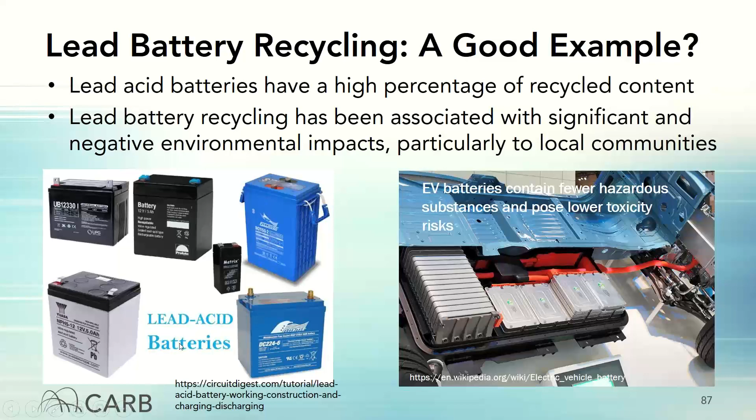Today's electric vehicle batteries rely on a small set of materials whose supply is constrained and could potentially be disrupted. Ensuring a durable supply of these critical energy minerals is important for achieving our electrification targets.

In recognition of that, in 2019, the U.S. Department of Interior, in collaboration with the Department of Energy, released a list of 35 minerals with the potential for scarcity that were deemed critical to the national security of the United States. In addition to platinum group metals, which are used in catalytic converters here in the bottom row, and rare earth elements, which are important for a number of renewable technologies including permanent magnets, that list of critical minerals included 7 of the main elements used to create battery electrodes in lithium-ion batteries.

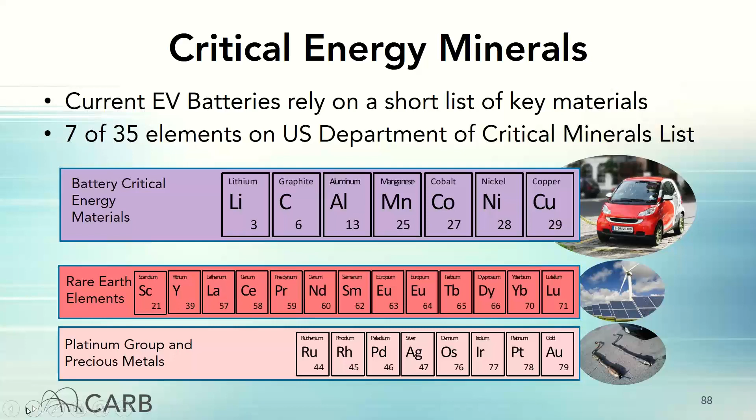So the rate of extraction of battery critical minerals has been increasing rapidly and is expected to continue growing over the next 10 years. At current rates of extraction, there are less than 50 years of primary or virgin cobalt remaining in identified reserves. This compares with a supply of nearly 100 years from a decade ago.

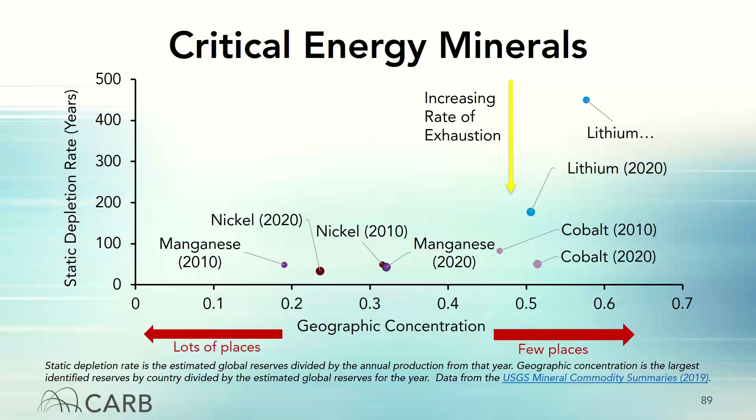Today, the supply of retired batteries coming off the road is relatively low. But that rate of retirements is likely to ramp quickly with increasing rates of adoption across both light duty and medium and heavy duty vehicle applications. Emerging research suggests that if regional recycling systems are developed, by 2040 and moving forward, more than half of the US material demand for lithium-ion EV batteries could be met with recycled sources.

Now, obviously, the US represents just a share of global demand for these materials, but it's highly likely that we will see regional supply chains develop for manufacturing of these systems.

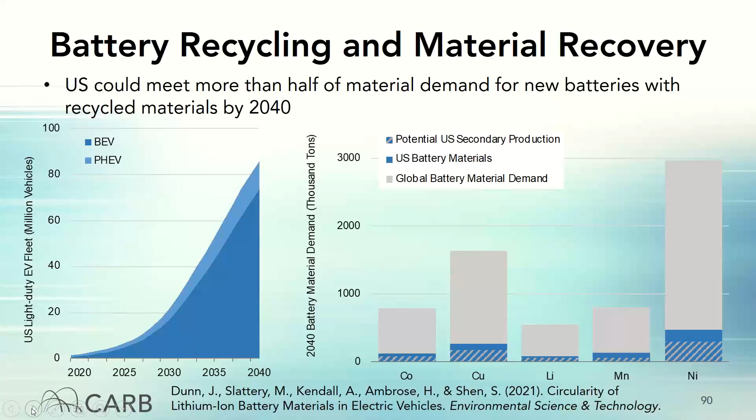Ensuring 100% of electric vehicle batteries sold in the state are recycled at their end of life will provide a key source of future battery materials. Over the long term, it's also critical to increase the recycled material content of EV batteries. Today's batteries rely on diverse lithium chemistries, and sorting retired batteries by cathode chemistry could be a promising method for concentrating valuable materials like cobalt, as well as reducing the need for additional refining before constructing batteries from recycled materials. To reduce barriers to current and future recycling operations, enable sorting, tracking, and reuse, and promote responsible design, critical information on the battery needs to be included with the battery system throughout the value chain. We think a battery label is an effective mechanism to potentially address some of these issues.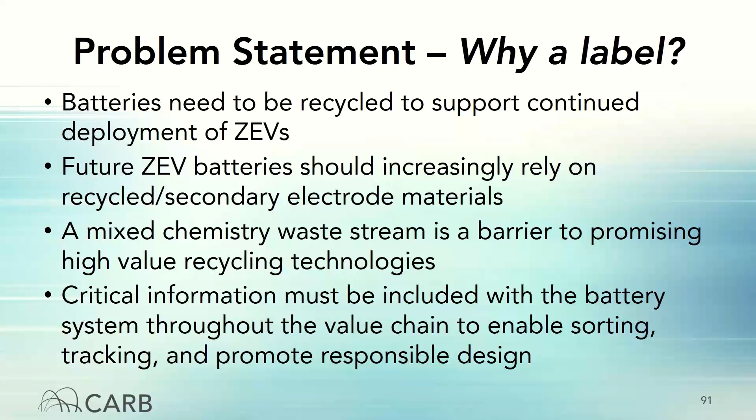So the concept for the proposed label would contain four key pieces of information. First, the cell cathode chemistry, which would use some set of standard abbreviations for the key transition metals in the cathode, providing information to recyclers and other stakeholders in the end-of-life or logistics value chain.

The label would also contain information on the capacity performance of the battery system, which would build upon the state of health and durability requirements discussed previously, and provide the rated cycles and output on a standard test cycle. The label information would also include the composition and voltage of the system or module, as well as the module and components of the power system.

A key piece of the label would also be a digital identifier, a QR code that could be linked to a digital repository of information, including additional safety information on the specific battery. The physical label illustrated would be linked to this digital identifier to create a forward-looking system for providing key information to stakeholders in battery end-of-life management.

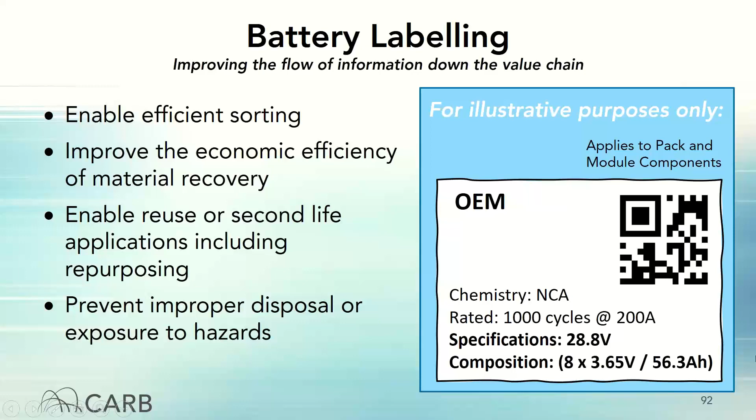In addition to this labeling proposal, CARB staff are evaluating additional concepts and continuing to actively engage with other state agencies to develop additional policy concepts and identify actions to support sustainable end-of-life battery management, recycling, and reuse. This includes participation in the ongoing lithium-ion car battery recycling advisory group led by CalRecycle and the Department of Toxic Substances Control, as well as participation in a multi-agency report on battery end-of-life and photovoltaic end-of-life that we hope will be released later this year. CARB staff also plan to participate in the SAE working group for this new standard-setting process for battery labeling that will be revised.